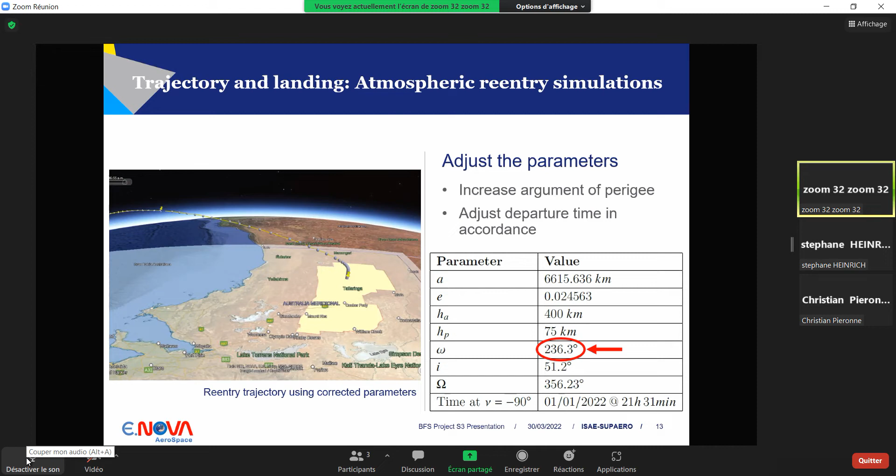So I was saying, this is the nominal trajectory, and from this case we're going to introduce variations in the parameters to get the effect of each of them.

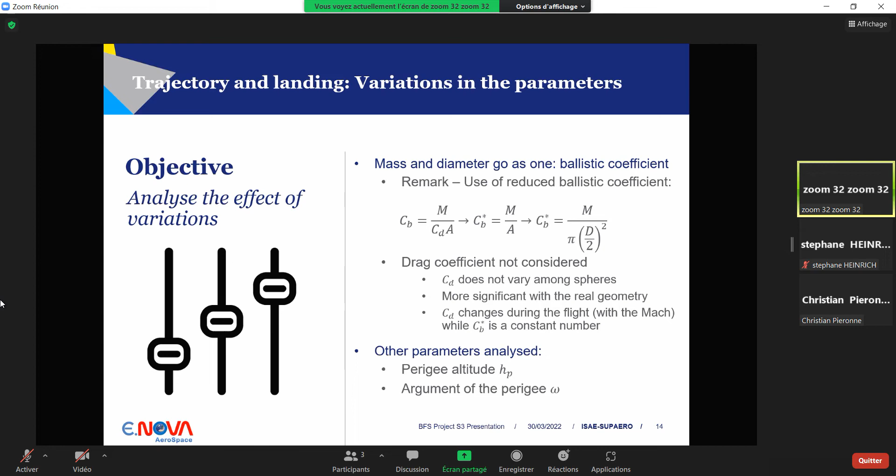First, this is the ballistic coefficient, which is going to be a major driver of the accuracy, in particular not the ballistic coefficient that also takes into account the drag coefficient, but the ratio mass over area, which we're going to call the reduced ballistic coefficient. Apart from this one, we're also going to study the altitude of the perigee and the argument of the perigee.

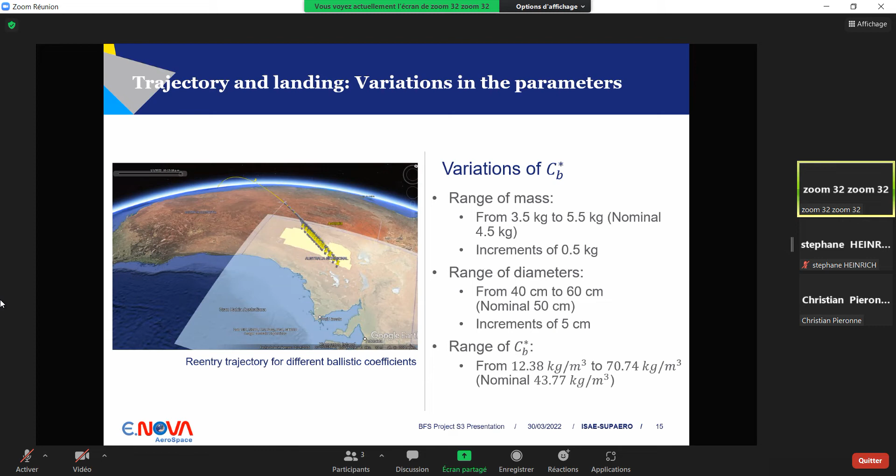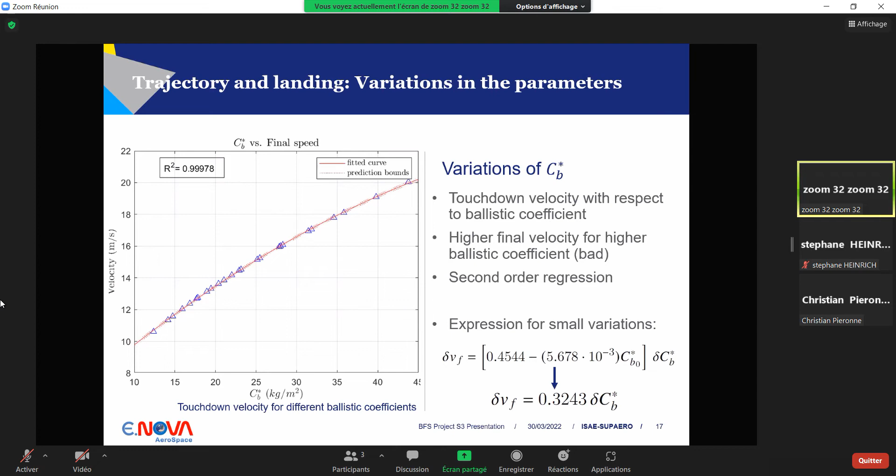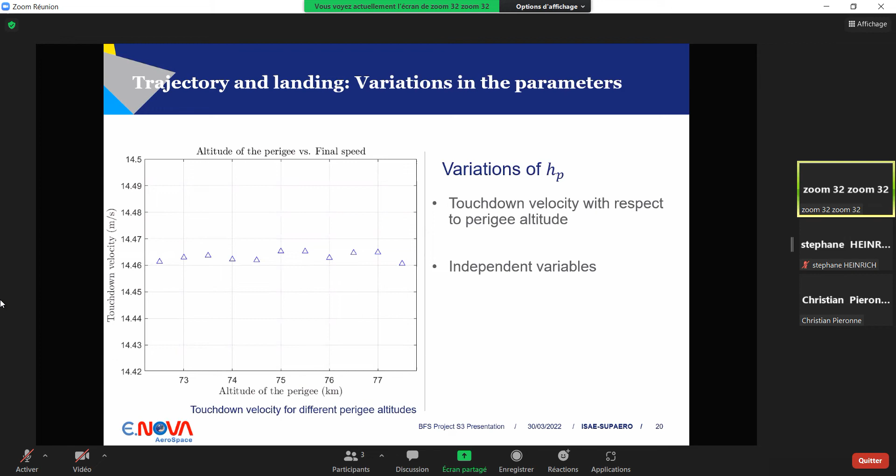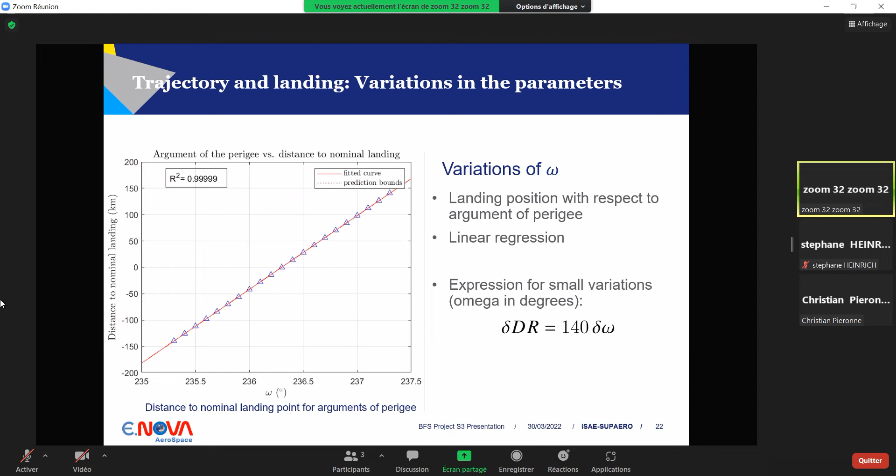We see that for the final velocity, there's no correlation — it's independent from that. Same study for the argument of the perigee: the more we increase it, it tends to fly longer, let's say. Again we do this linear approximation and get this expression with the argument of the perigee in degrees. It's important, and again we see that the velocity is not affected by this.

Then what we do now is combine all these parameters together and do a sort of worst case scenario with 200 grams of mass error, 3 centimeters in the diameter, 1 kilometer in the altitude of the perigee, and 0.5 degrees in the argument of the perigee.

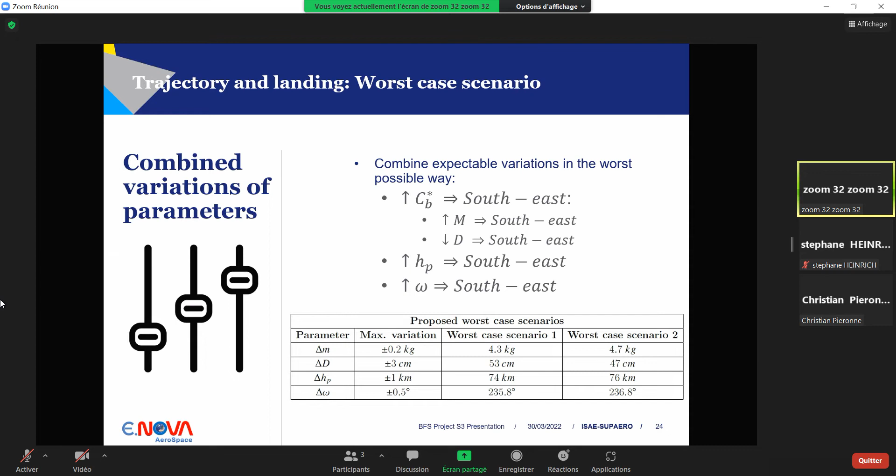We combine them in a way that all of them contribute to the same direction in the two cases, so more to the southeast and more to the northwest. This is what we get: the two results fall almost at the front, at the border of the landing zone. So this is a good first approach to know the range and order of magnitude of the values that we can afford.

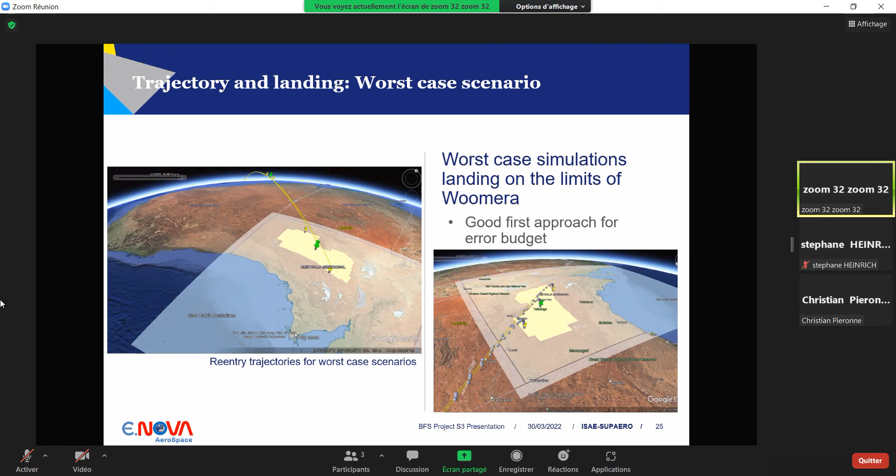What we did now is also combine the expressions we presented before with the superposition principle, as this is for small variations, and validate the previous results. We see that the results are close to each other.

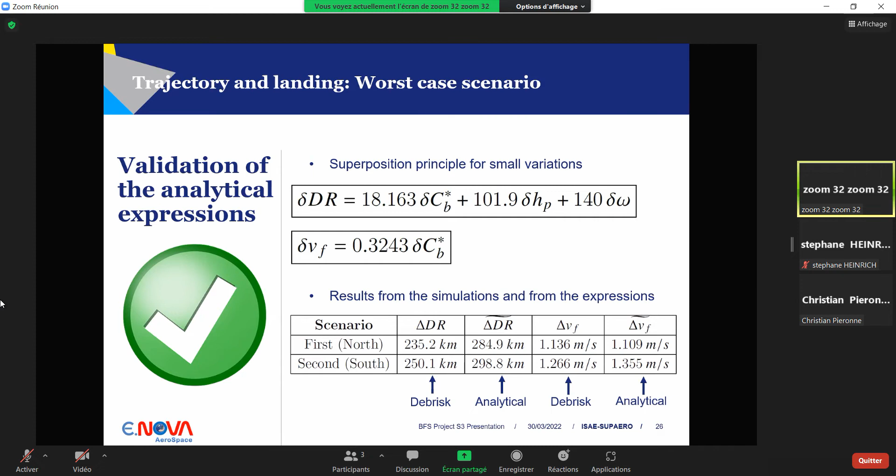They are not perfect because it's not really a small variation that we introduce here, but more of a worst case. Still, we see that the order of magnitude is good, so we can validate the expressions as a way to estimate the effects.

Then what we did is study the repercussion of these requirements on the requirements that we have to request from the subsystems, the propulsion system in this case, that will provide the orbit boost.

This is related to the altitude of the perigee, and for the maximum distance we have for Woomera, in this diagonal we see that 235 kilometers will be the worst error we can afford. We get this with only a 0.69 meters per second error in the delta V.

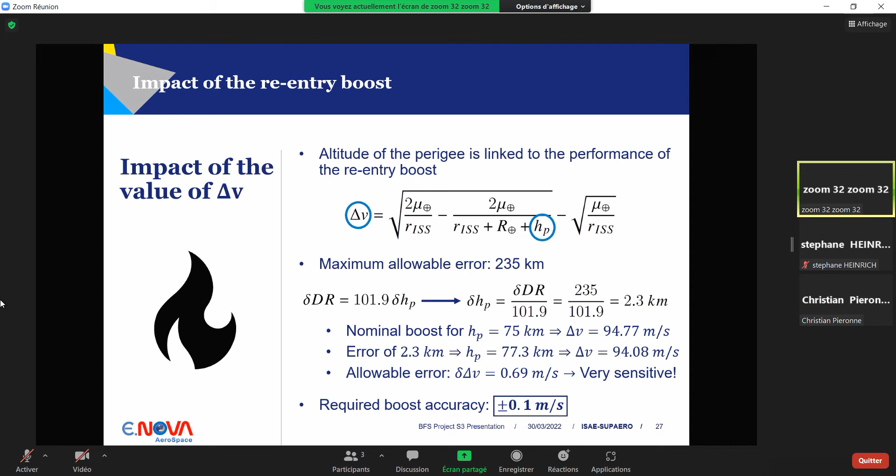So it is very sensitive, and we have to require the landing system, the propulsion system, for the orbit burn accuracy in the order of 0.1 meter per second.

Then there's also the pointing during this boost that will have to be provided by an AOCS system. It will induce two errors: one is that the effective velocity will be less in the linear direction.

It's related to the previous effect, and we're going to focus on the case of a 5 degrees error in the pointing. It will induce a downrange error in the end of 123 kilometers, which is a lot, but still acceptable for the ranges we were dealing with.

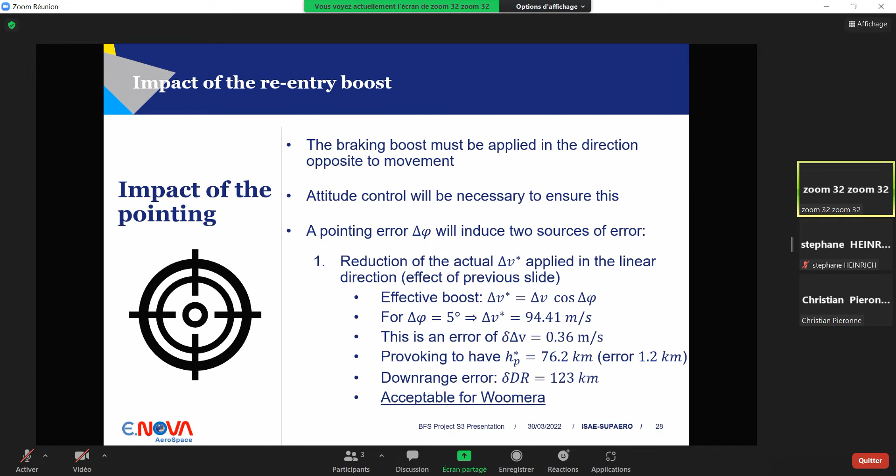And the other effect is the induction of a transversal component that will induce a slight change of plane, but we see that the velocity we induce is very small. The change of plane of inclination is less than 0.1 degrees, so the downrange error in this transversal direction is only 15 kilometers, which is perfectly acceptable for Woomera.

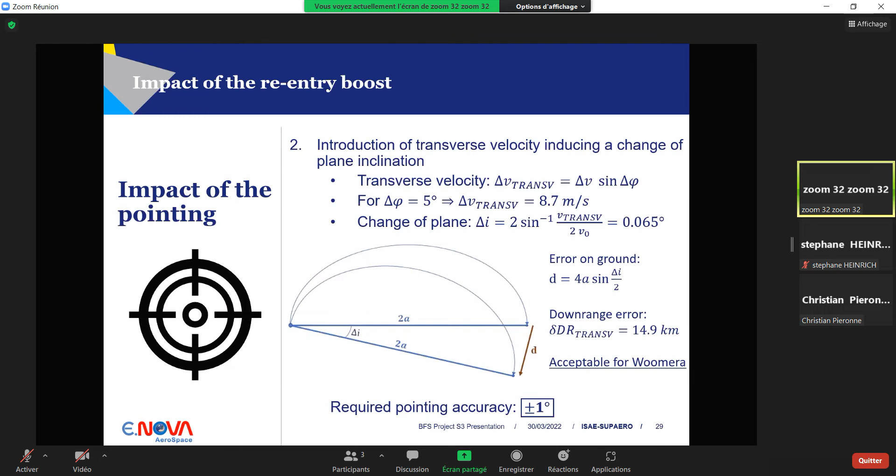So between these two components, both cases were for 5 degrees, remember, so we say that pointing accuracy in order of 1 degree is acceptable. And that will be all for the trajectory definition.

We move on to the definition of this payload module for in-orbit demonstration and validation. First thing we did is to define a set of preliminary requirements for the mission. We want to measure during the reentry, collecting data for temperature, heat flux, pressure, accelerations, and GPS position and velocity, and transmit all this data to ground, fitting everything in a 1U format if possible, with all the auxiliary means to manage the data handling and power supply.

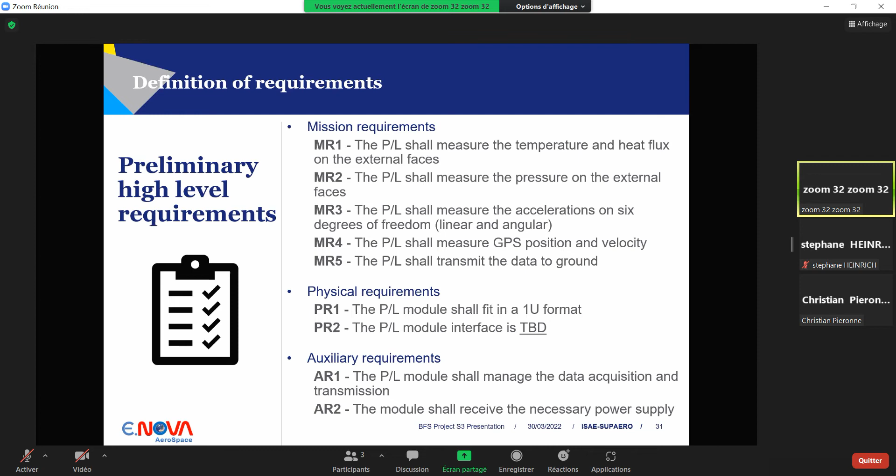So what we did is define a design architecture and decide a set of hardware that could fulfill these requirements. Many of them were taken from flight heritage of the EntrySat project, which actually had a very similar mission to what we want, recovering data during reentry.

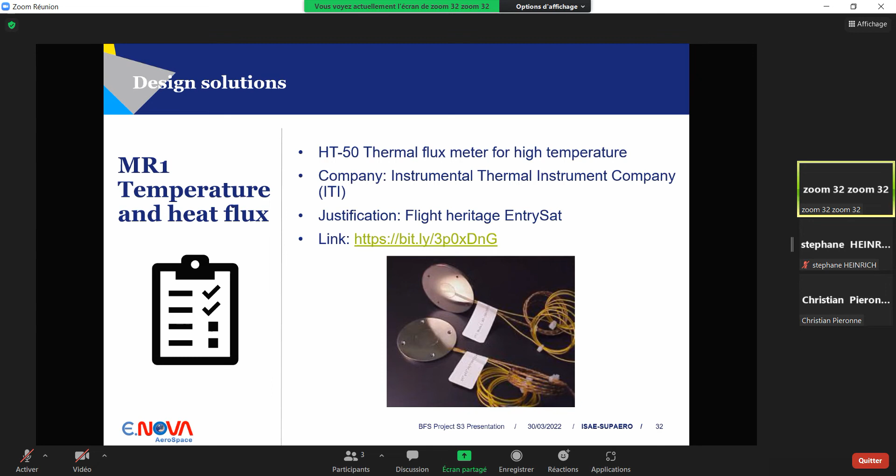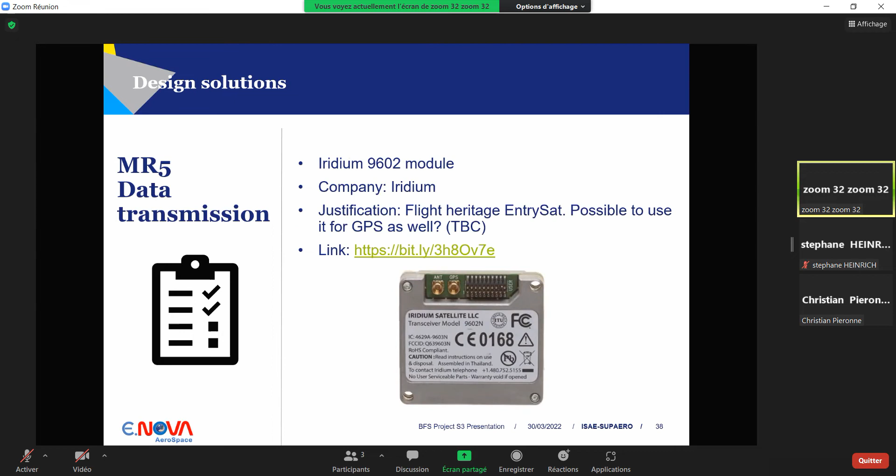So we have these temperature sensors, also selected pressure sensors, this accelerometer, the IMU, antenna for the GPS that is actually going to be the same one we can use also for the Iridium, the GPS receiver, same antenna for the Iridium for data transmission, and the Iridium module. We also have to confirm, because it's possible we can use the same module for GPS and Iridium, in which case it would be very important to save that space.

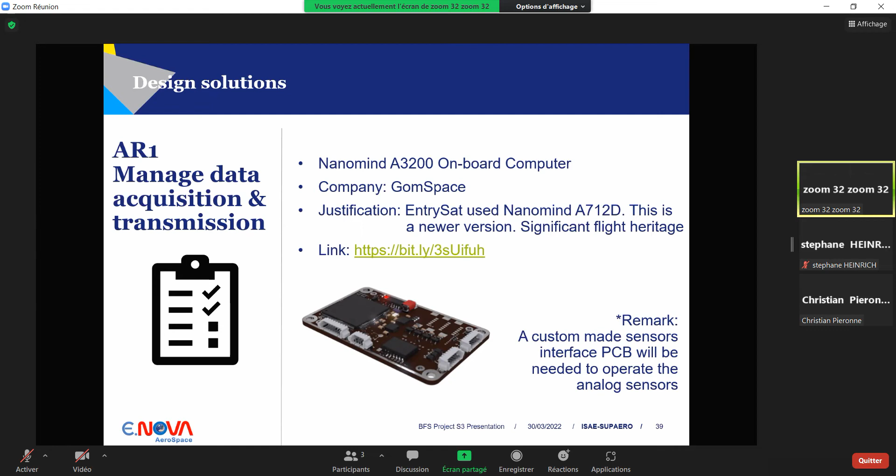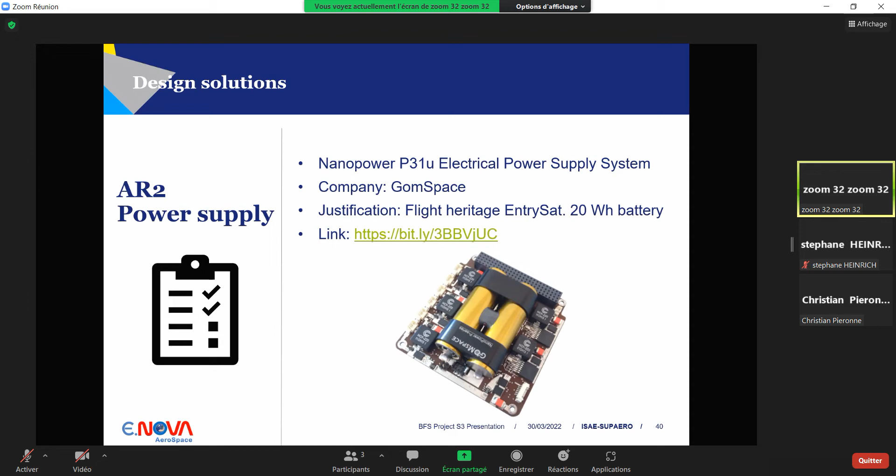Data handling is going to be managed by the onboard computer by GomSpace, and for compatibility with GomSpace, it's going to be good to also use the electrical power supply system from them. After evaluation of the power budget, if needed, it's also possible to use an additional module of batteries for the system. So this would be the architecture, and this would be an overall block diagram of the layout.

Also important to highlight that we will probably need a sensors interface board to manage the analog sensors with the onboard computer, and we will have to take into account the interface with the rest of the platform and the other systems.

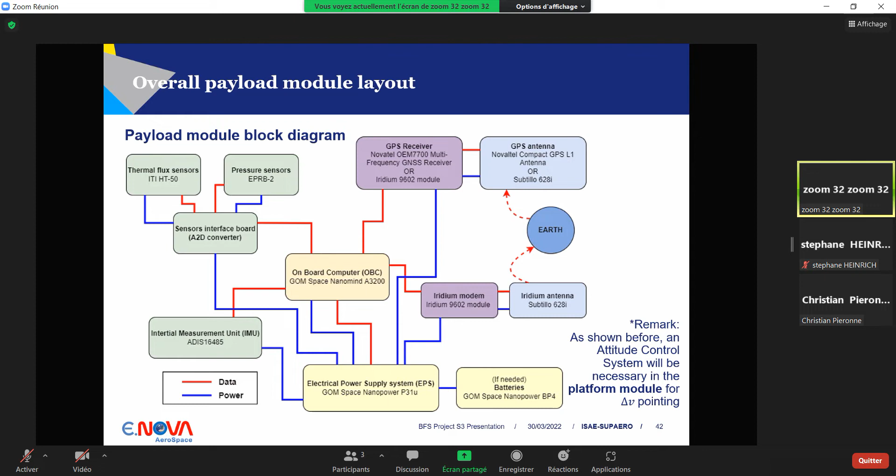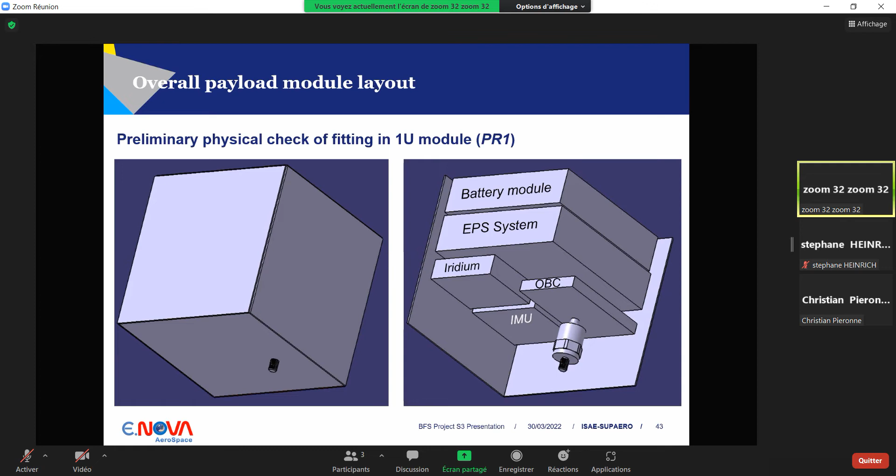Then we did a very rough preliminary check, getting the external dimensions of all the elements and trying to fit them in a 1U module, in a very rough CAD model. We saw that everything would fit in first instance. We will also have to take into account the interfaces and the space for wires and cables, but at least it looks feasible in first approach.

Then we move on to a thermal analysis, and for this we're going to study the effect of the thermal shield and how thick it should be. We're going to start from a given input external temperature of the surface, and we have two objectives. First, we will have a layer of flexible thermal protection system, F-TPS, and we want to keep the internal temperature below 600 degrees, and then the payload inside has to be insulated to keep it below 60 degrees.

And for that we will follow these steps. First, we will focus only on the thermal conduction through the thermal protection system, the external system. Then we will study a case imagining that we don't insulate the payload, assuming it is not in contact with the F-TPS, and how the radiation transmission will be. We're going to need an insulation and size the multi-layer insulation. Then we're going to validate this with a case, because in principle we're going to use a constant external temperature, and then we will validate with a variable case.

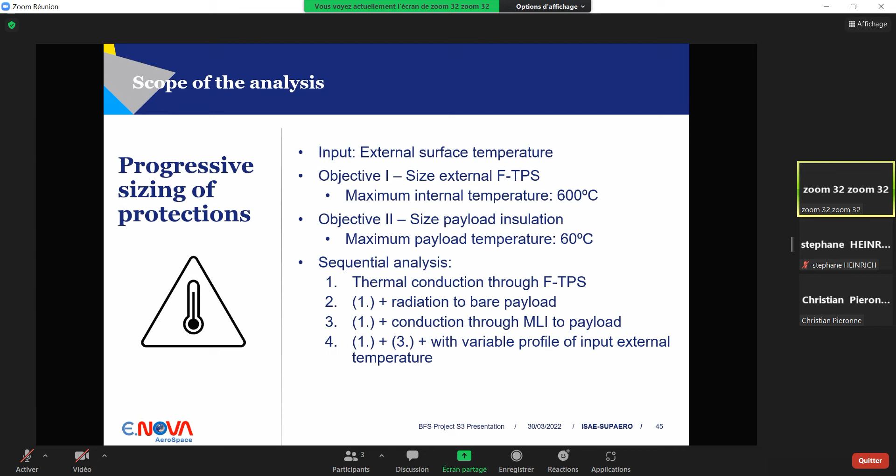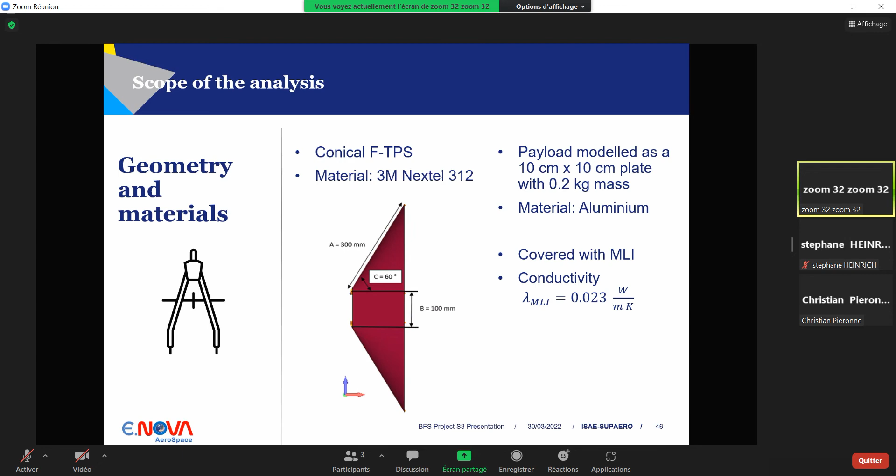Geometry-wise, the flexible thermal protection system has a conical shape made of Nextel material. The payload is going to be modeled as a 10 by 10 plate, so the exposed surface of 200 grams made of aluminum, and it's going to be covered with a multi-layer insulator of this conductivity. These are the different input temperatures we're going to use from eNOVA's BFS specifications. We have to withstand these two first criteria, so they're going to be the most important ones.

1500 degrees for 1 minute, and 1000 degrees for 5 minutes. We're also going to use these other cases for validation: one for a longer time, averaging the mean temperature, around 650 degrees for 700 seconds, and finally this one with the variable profile with some margins.

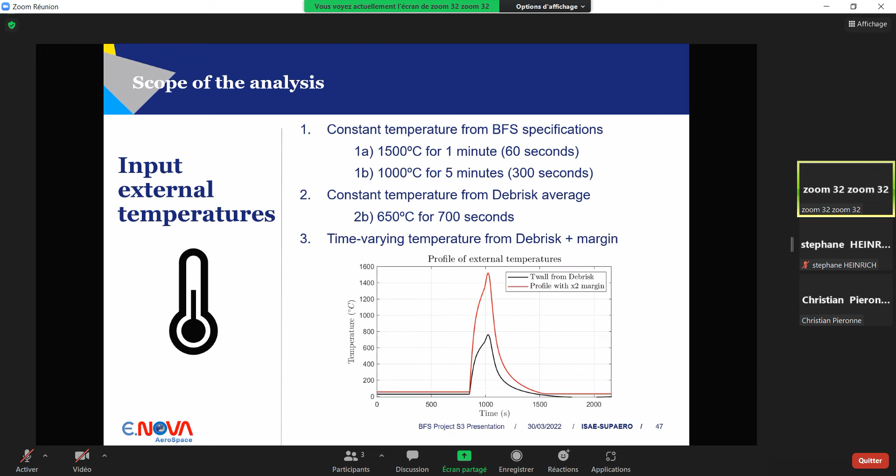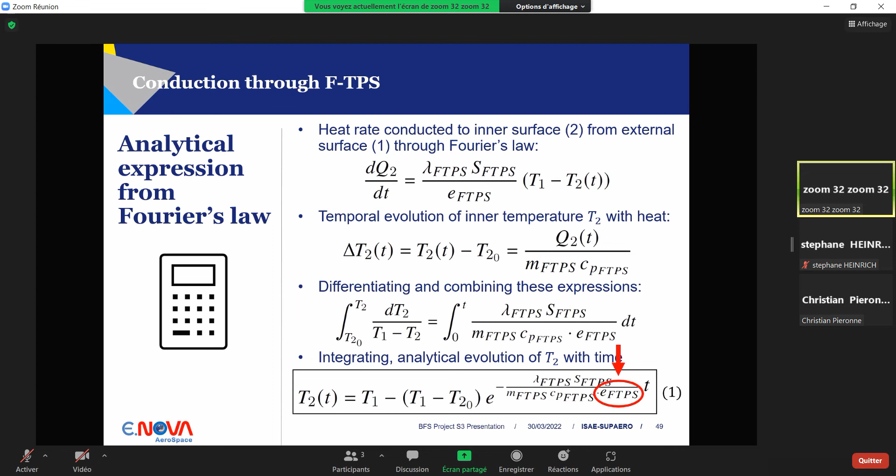Then for conduction, the first step is to analyze the conduction through the external shield. We start from Fourier's law. We also use the equilibrium of temperature, the evolution of the internal temperature T2, put them together, integrate, and get this analytical expression.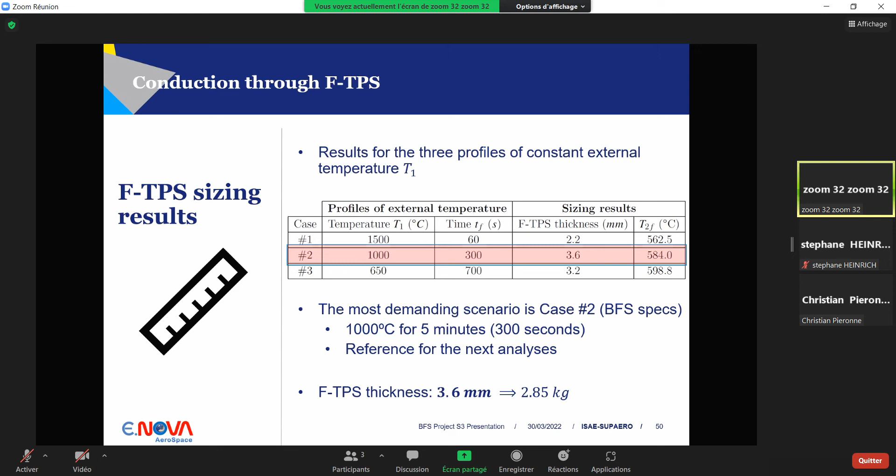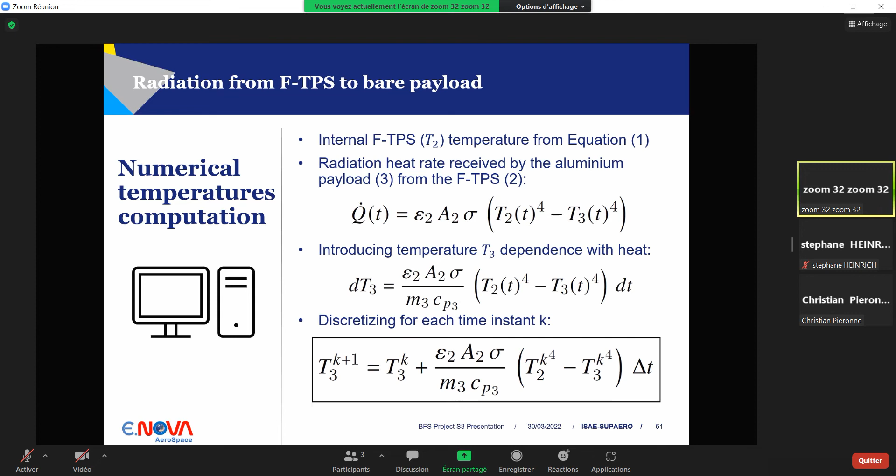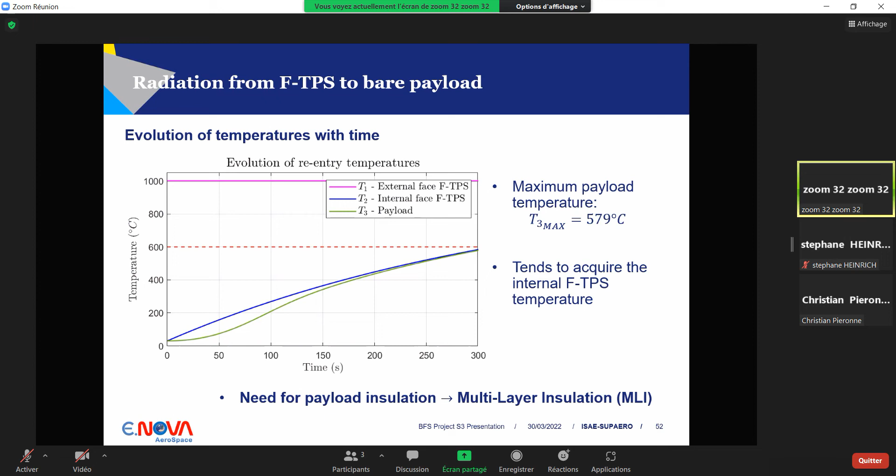So we see that it's not acceptable to have it without insulation. What we do here is introduce a multi-layer insulation and study this transmission of conduction through the multi-layer insulator.

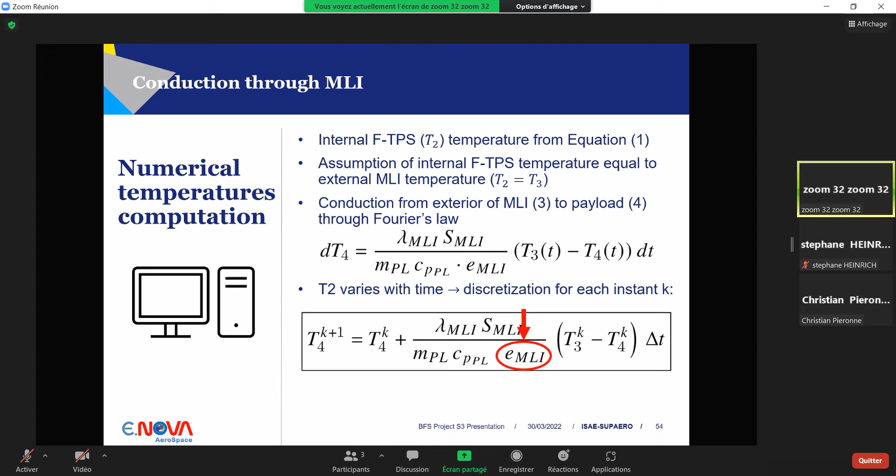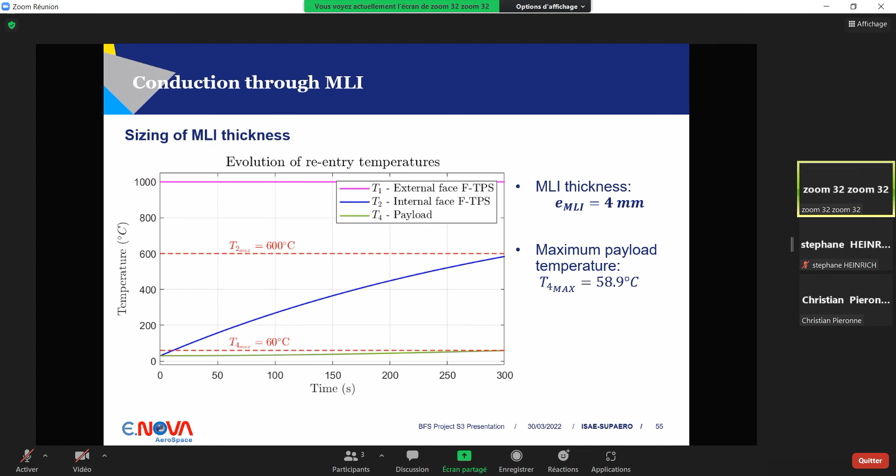As the temperature of the internal F-TPS varies, it will induce a variation in the temperature of the MLI. The final temperature of the payload, T4, would depend on the thickness of this MLI, which is again the parameter we want to size. After some iterations, we see that the minimum size we need is 4 millimeters for the multi-layer insulation. The blue curve is for the internal side of the F-TPS, and the green one for the payload, and we see that it's kept below 60 degrees at all times, 58.9 to be precise.

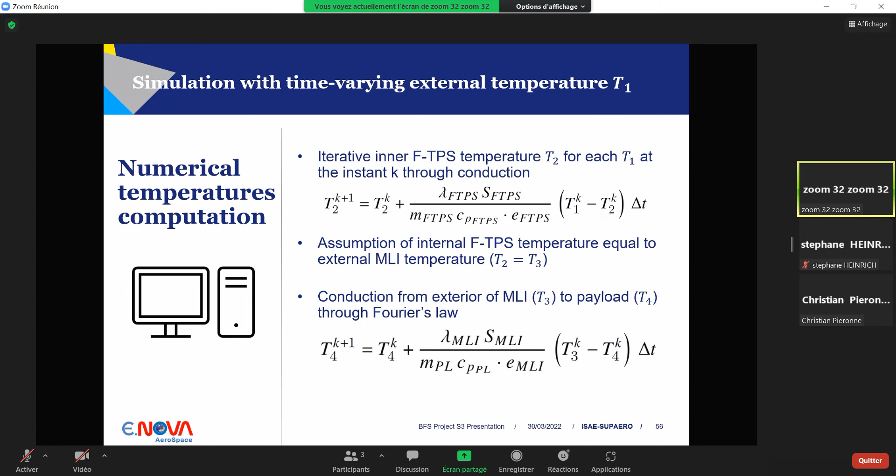And that's it. Now we follow this scheme to validate everything with the external time-varying temperature. So first, conduction through the F-TPS. Then we assume that the internal temperature of the F-TPS is the same as the external one of the multi-layer insulator, and then conduction through the multi-layer insulator. These are the expressions, and we get these temperature profiles, and with these thicknesses we see that we comply with the requirements.

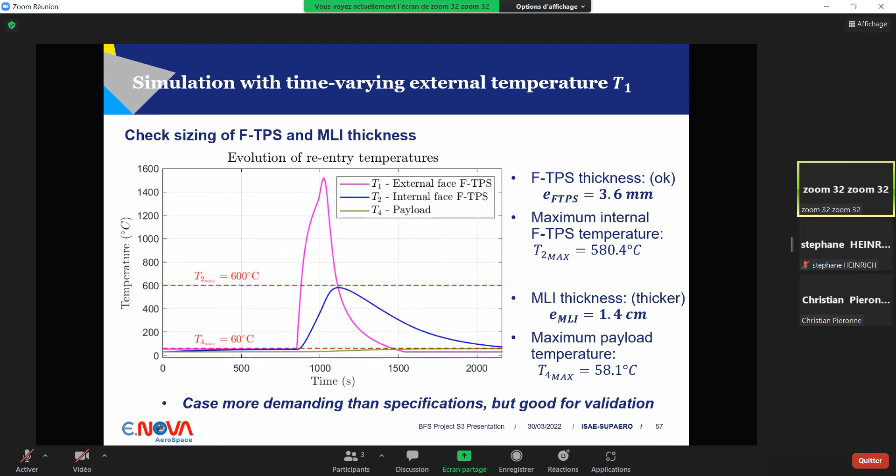Then we finally did a quick rough structural analysis of the heat shield, this F-TPS cone, because as this is the exposed surface during reentry, it will determine the drag coefficient and the ballistic coefficient with it. So the requirement is that the maximum deflection has to be less than 15 degrees.

For that, we're going to model it as if it was supported by 8 beams made of shape memory alloy material, nitinol in particular. These beams are going to be modeled in this first approach as slender beams in fixed cantilever condition, with a circular cross section, whose diameter D is the parameter we want to size. In particular, it would have an effect on the second moment of inertia that is going to appear in the analytical expression.

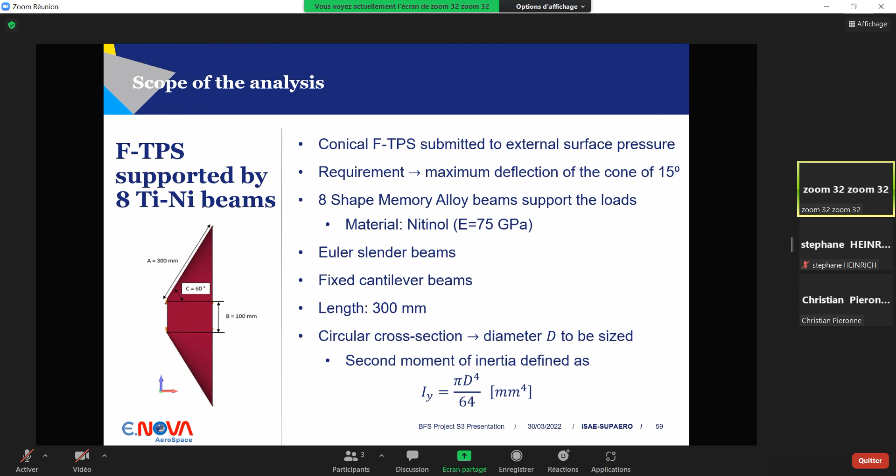So this is the applied load, which is based on the surface pressure defined from e.NOVA's specifications, 3,400 pascals. This is going to be uniformly distributed along all the surface of the cone. And then from this total force, we divide it into the 8 beams, and for each beam, we distribute it uniformly for the length. So this is the value of the load and the distributed load for the beams.

The requirement is that the maximum displacement has to correspond to a maximum inclination of 15 degrees, so from 60 to 45 degrees. And we get that the maximum deflection is 78 millimeters at the tip.

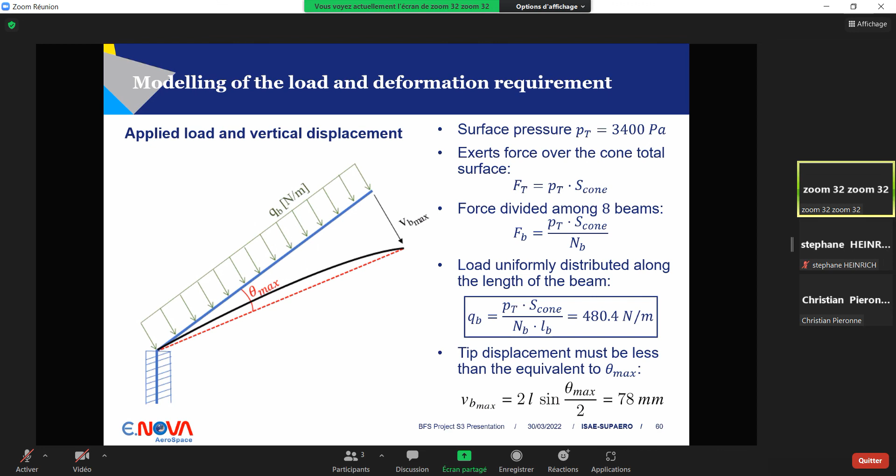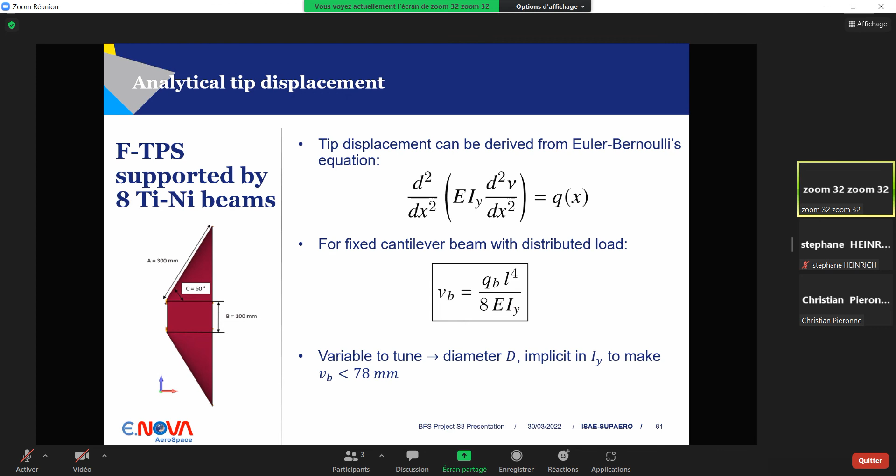This is a simple problem with an analytical expression from the Euler-Bernoulli equation. For the fixed cantilever beams, this is the expression that depends on the length of the beam, and especially on the moment of inertia, where the diameter is implicit. Again, we iterate, and we get that for 6.5 millimeters of thickness, we get a tip displacement of 74 millimeters, which is less than the 78 that we required.

This is good because the mass of the beam would be only 64 grams. For the 8 beams, it would be around half a kilo. This is good for the tight mass budget of the system. Here we can see that it's possible, and we should introduce some margins to take into account model uncertainties, because it's a preliminary and rough model, but we have to take care here because mass is very sensitive to variations in the diameter. If we multiply the diameter by 2, the mass is increased by 4. So it's something to take into account.

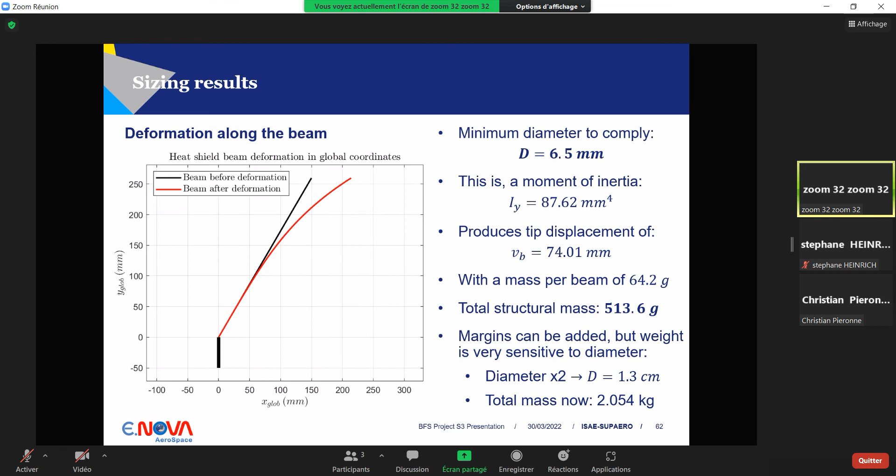So in conclusion, to recap a bit what was done during the project: we first did this trajectory definition methodology that was implemented in MATLAB, and it's easy to iterate for different cases. We studied the landing accuracy, where we found that the ballistic coefficient is a major driver, together with the altitude of the perigee and the argument of the perigee. We gave some analytical expressions for this first approach, and we also saw the effect of these parameters on the accuracy that we have to request from the other subsystems, like the propulsion and AOCS systems.

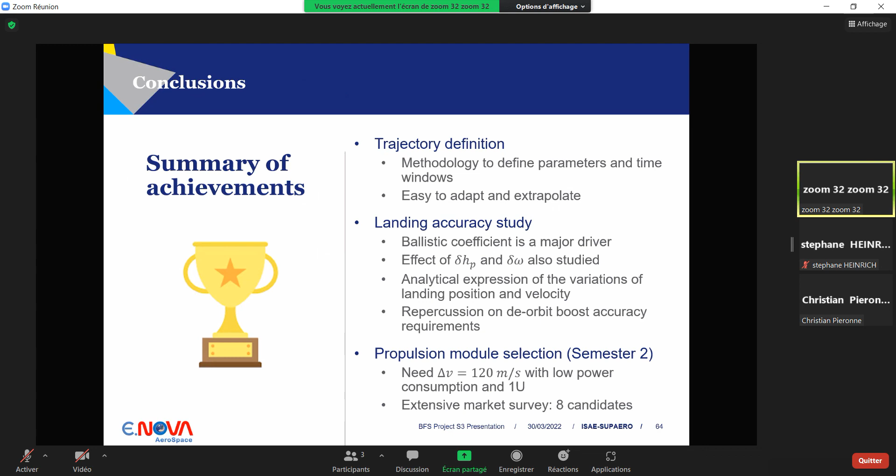During the second semester, we also selected a propulsion module among different candidates. We defined some requirements and selected 8 possible candidates for 1U propulsion modules. And then we also defined a payload module for this in-orbit demonstration validation mission, setting the preliminary requirements and designing an architecture and proposing some hardware solutions to fulfill them.

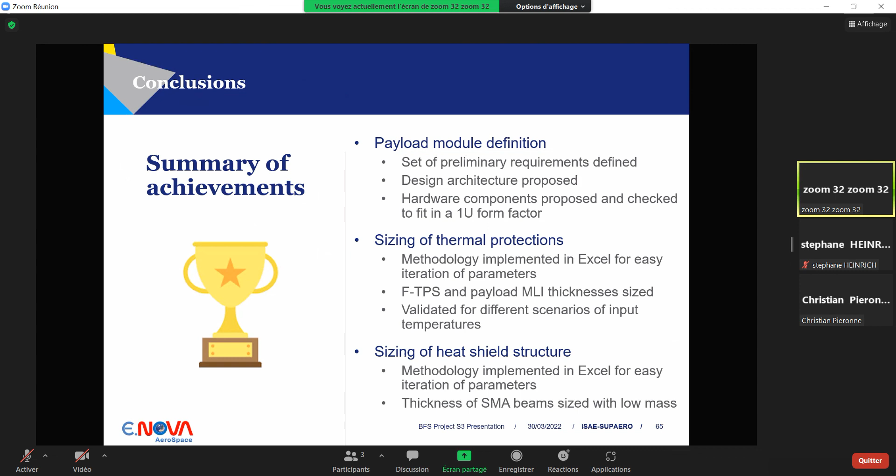Then we focused on the thermal system, and it's important that all the methodology presented was implemented in a simple Excel sheet that was shared with e.NOVA, so that they can now easily iterate with the parameters and play with different geometries and materials and get the sizing. With this, we could size the F-TPS and the MLI for the payload, and we validated this with different input temperatures. Same for the heat shield structural analysis - we implemented it in an Excel sheet, so it can also be easily iterated for different properties of the parameters, loads, etc., number of beams, and so on. And for that, we can size the thickness and the mass of the beams.

So working perspectives of the BFS project from now on for e.NOVA are basically to go further in all this analysis. So to validate the data of the landing accuracy, ideally it would be with this in-orbit demonstration flight. Also, we have to confirm the propulsion module, so consulting the suppliers and doing a final assessment taking into account the cost as well. For the materials, it is targeted to validate these materials and also this analysis with a test in a plasma wind tunnel in DLR in Germany.

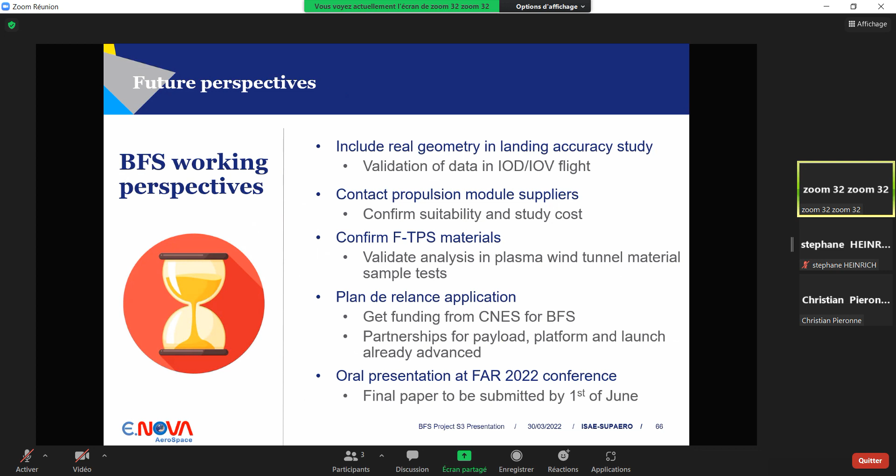And finally, they are working on the application for the Plan de Relance from CNES to get some funding for the project, and for that there are advanced contacts with platform, payload, and launch suppliers. Finally, last but not least, they got an abstract accepted for the FAR 2022 conference in Germany by ESA, and we will work on the paper to be submitted by the 1st of June, and then there will be an oral conference there. So that's all. Thank you, and let me know if you have any questions.